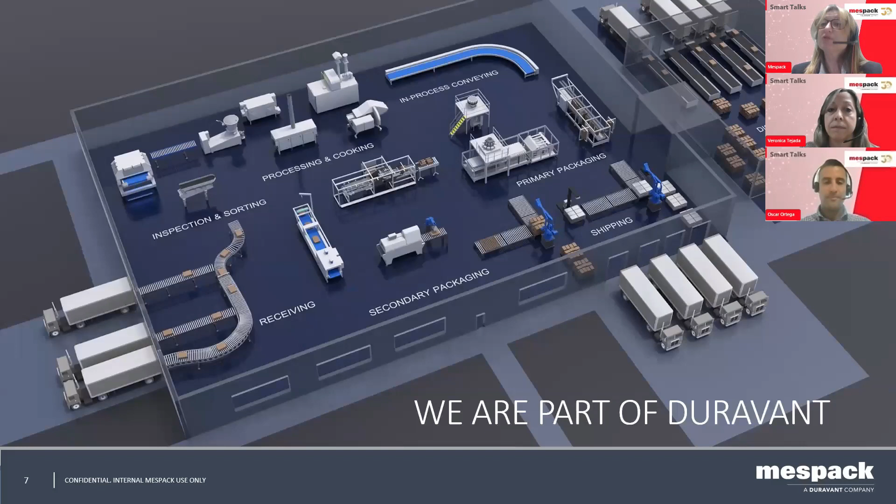Mespack has been part of Duravant since 2015. Duravant is the leading player in the world of industrial equipment. Headquartered in Downers Grove, Illinois, Duravant is a global engineered equipment company with manufacturing, sales, and service facilities throughout North America, Europe, and Asia. Given its portfolio of operating companies worldwide, sales, distribution, and service networks, Duravant provides immediate and lifetime aftermarket support to all sectors shown here, serving the food processing, packaging, and material handling industries with various operating companies and brands.

Here at Mespack, as mentioned before, Mespack was established in 1993 as a horizontal form, fill, and seal manufacturer. After 30 years, this year we are celebrating our 30th anniversary, having become a strong and reliable one-stop shop player with premium services worldwide.

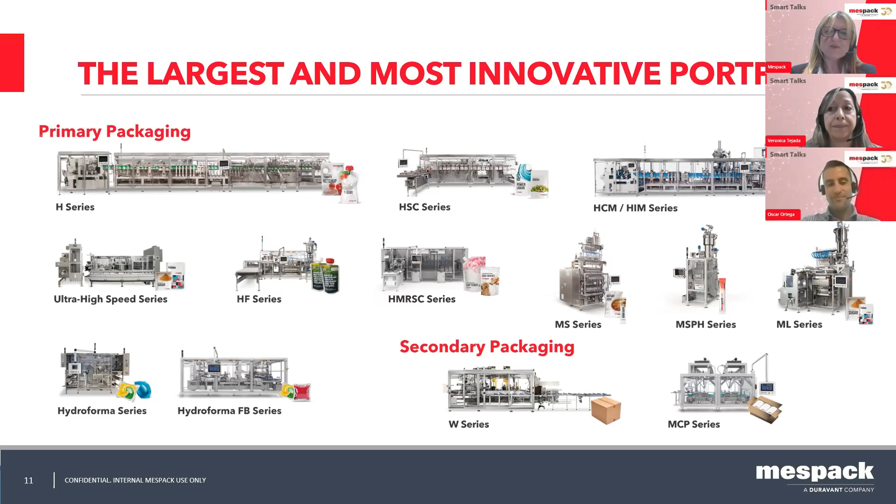We also extend beyond primary packaging with our end-of-line equipment, offering a range of suitable technologies to fit your secondary packaging in your manufacturing line, with targeting solutions if you need it. So this marks the beginning of our introduction to Mespack, providing you with the opportunity to familiarize yourself with who we are.

But now, Oscar, I'll pass the floor to you. Thank you. Thank you very much, Veronica. So let me make sure I have control over this. Yes, I do. Okay, so good morning, everybody again.

I still remember when it was 2019 that we first heard that the industry would require that all laminates used to produce pouches on our machines would need to be from a recyclable material at some point. At that time, I can say that we are proud that we embraced that as an opportunity, not as a challenge or a risk, to help our customers transition to those requirements.

We knew we could not do it alone, so we needed the help of customers, but also of laminate manufacturers, pad manufacturers, all the stakeholders that participate in this industry, to join forces and understand what needed to be done in our machines in order to make sure that they could smoothly transition to that.

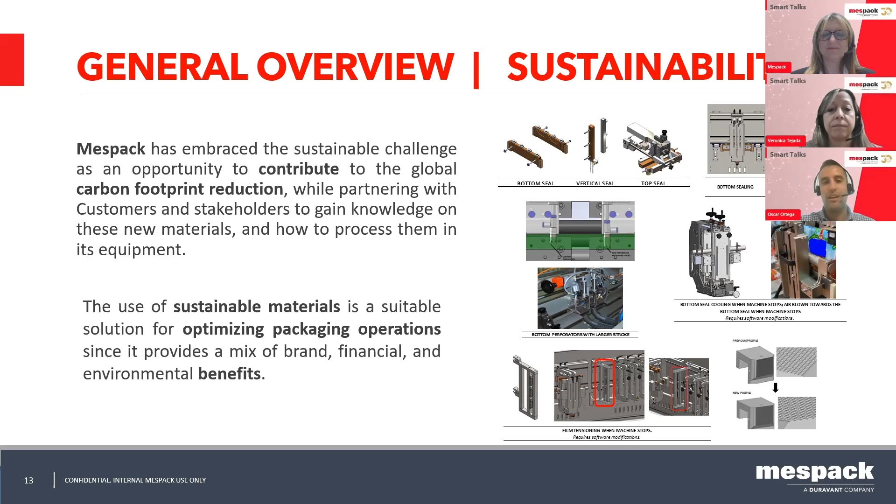We took the approach that we wanted solutions to be applied not only for new machinery, but also to the machinery that we have in the installed base nowadays, so customers with an existing machine could adapt it. So all the kits that we will walk you through now are kits that we can adapt to existing machines, but also to new equipment.

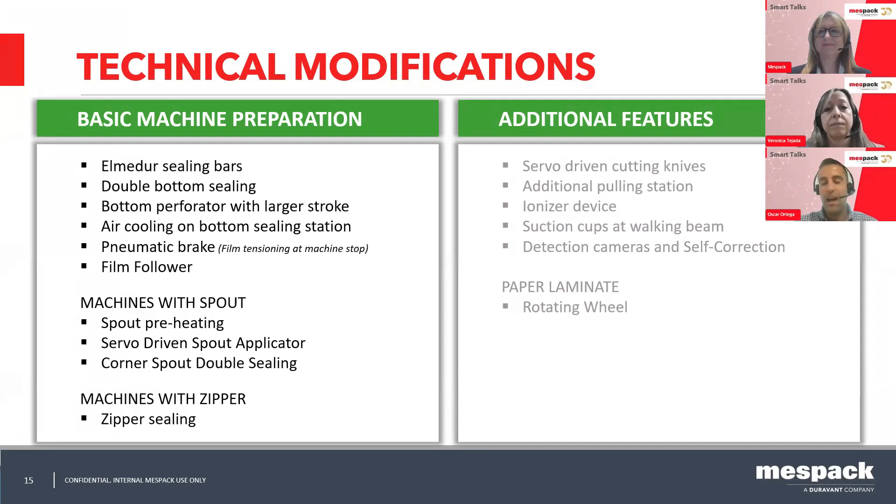We have separated them into what we call basic, because it's kits that we would recommend straight away if you want to modify your machine, but also if you want to get a new machine. And there are some additional features that we do not consider mandatory, but in some cases they can be based on some learnings that we have. In any case, they could add value for your machinery.

To begin with, Veronica will help us walk through the first slides, and I will take over later on to finalize. So Veronica, please.

Okay, thank you, Oscar. Let's start with our intelligent packaging solutions. First of all, the sealing bars have to be made of Elmedur material. Standard sealing bars, not Elmedur, have a variation of plus or minus 10 degrees across the sealing bar, while Elmedur sealers have a variation of plus or minus 3 degrees. Recyclable film does not allow big variation across the sealing bars, so for this reason, we recommend Elmedur sealers in order to get the proper seal.

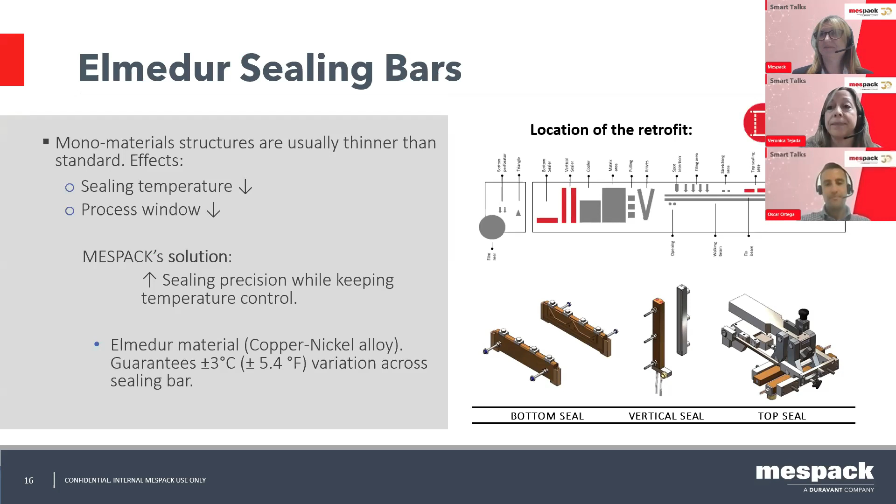Double bottom sealing station. With this kind of film, we have to add a second bottom sealing station to do the sealing in two steps with less temperature. Configuration will be: first station, Elmedur-silicone; second station, silicone-Elmedur. With this configuration, we ensure a correct seal at the triple point.

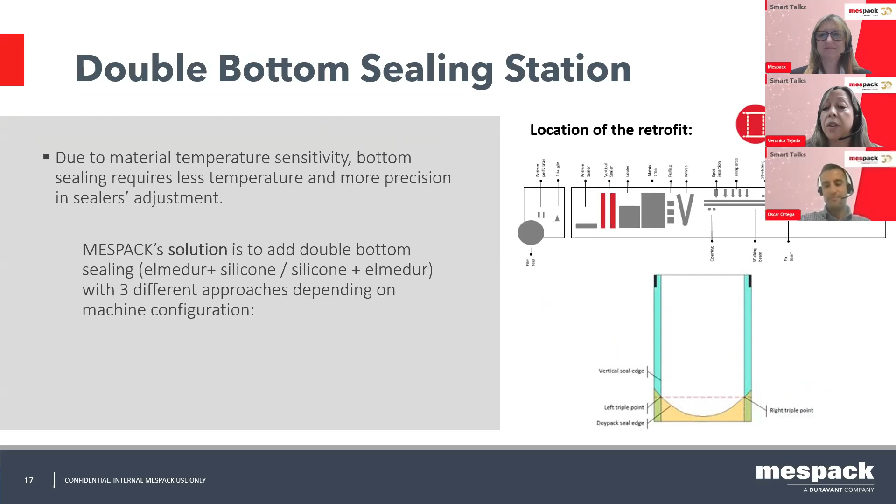There are three different approaches. Option 1: machine with enough space between bottom and vertical sealing. In this case, we will add a second station with the same configuration that I mentioned before.

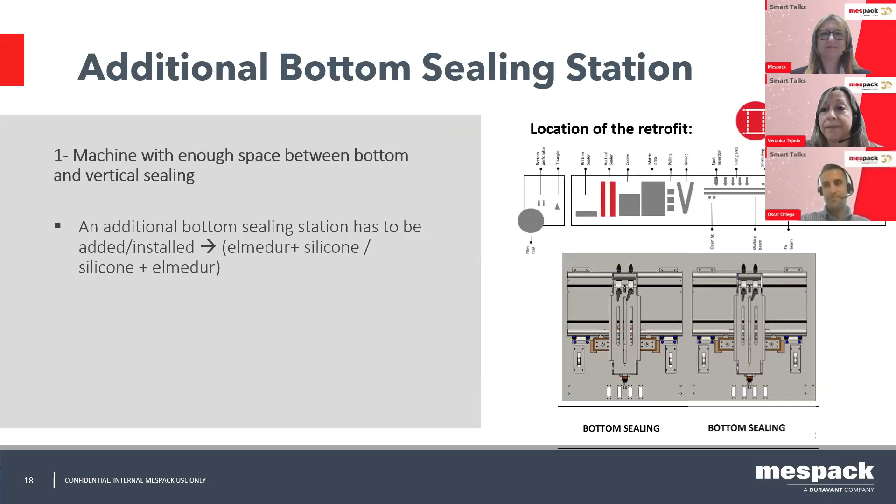Option 2: machine with no space between bottom and vertical sealing. We will have to add an independent module between the unwinder and machine frame. Here we have to take into consideration that the machine footprint will increase by about 1 meter.

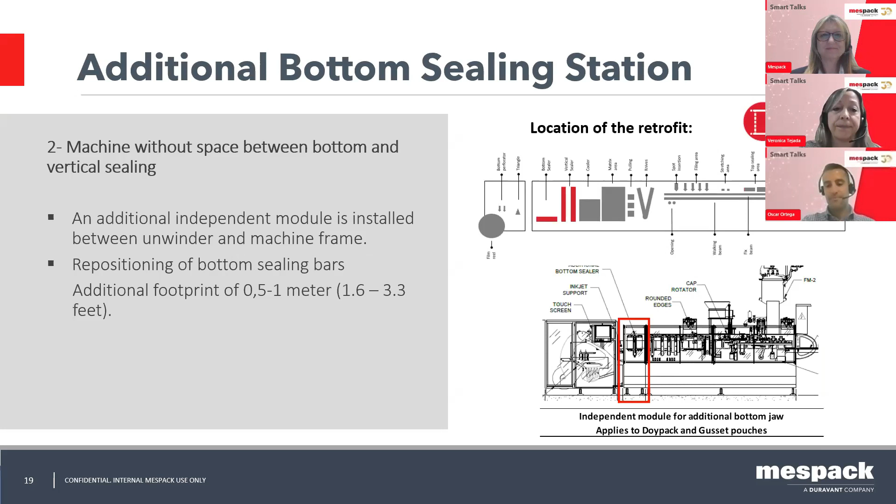Option 3 is machine with zipper. In this case, we will adapt the zipper station. We will add bottom sealers at the zipper pointer station, and all the sealers have to be made of Elmedur.

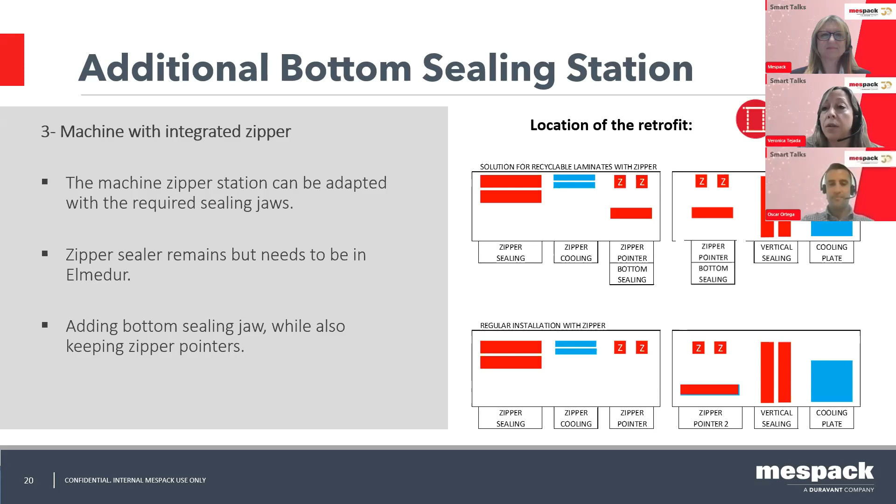Bottom perforator with large stroke. New materials are more flexible, so with standard bottom perforators, we cannot get proper perforation of the film. The solution is to add large stroke bottom perforators to ensure the perforation and the scrap removal.

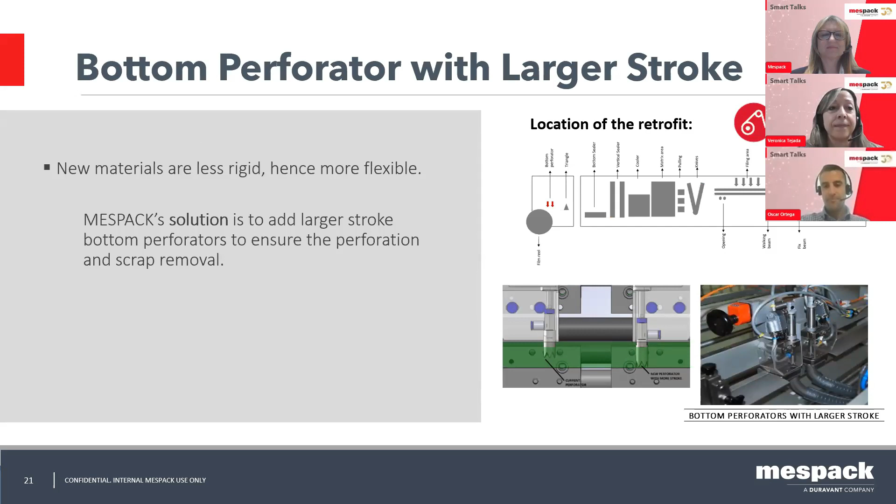Air cooling on sealing station. When the machine stops, there is heat accumulation in the bottom sealers, and the film may stick to the sealing bar surface, so you will have to clean the sealers, which means additional downtime. The solution is cooling the bottom sealers using an air turbine.

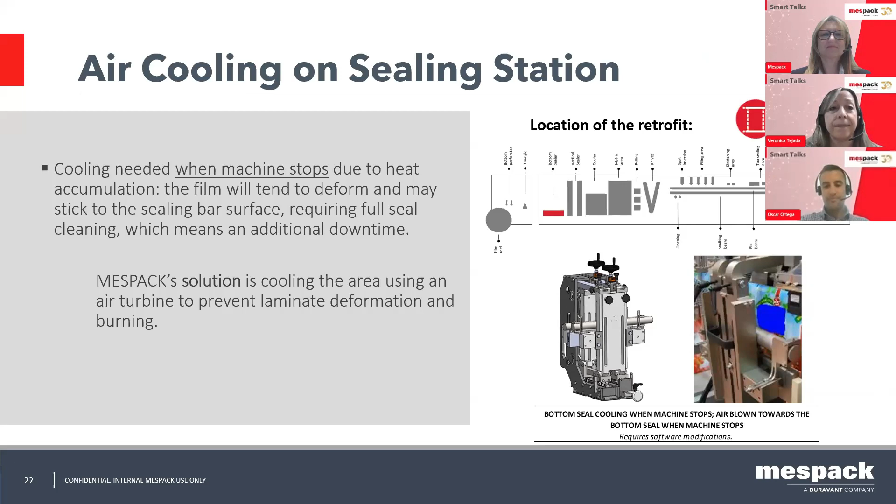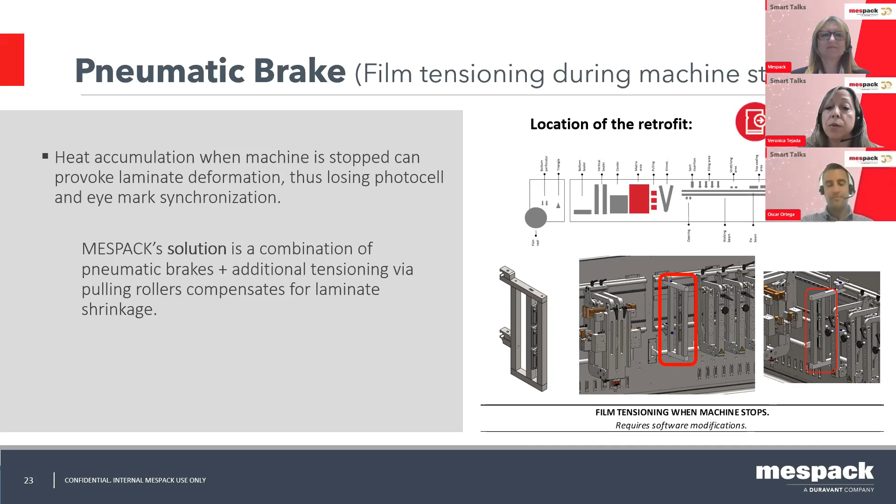Pneumatic brake. As I mentioned before, when the machine stops, there is heat accumulation, and the film deforms, causing loss of the photocell and eye mark. The solution is a combination of pneumatic brakes plus additional pulling rollers in order to compensate for laminate shrinkage.

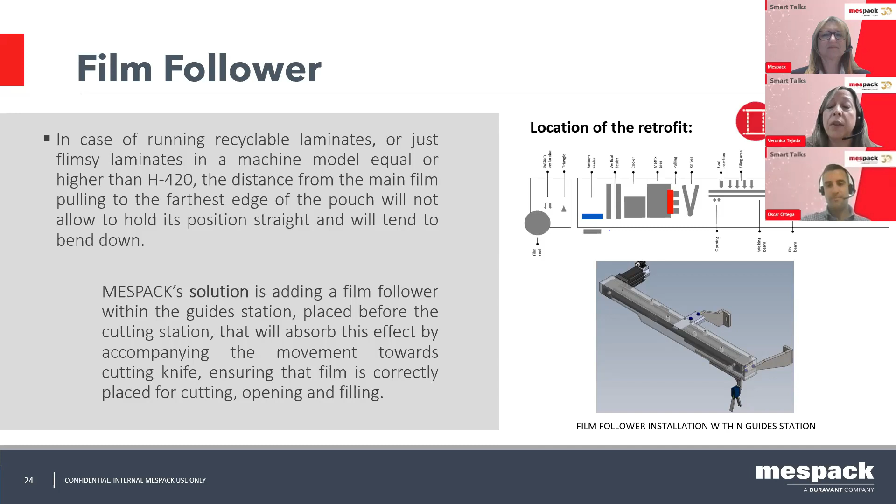Film follower. If we talk about machines higher than H420, the distance from the main pulling to the pouch does not allow a straight position of the film, which means the film could droop down. The solution is to add a film follower before the cutting station, so we get correct positioning of the film.

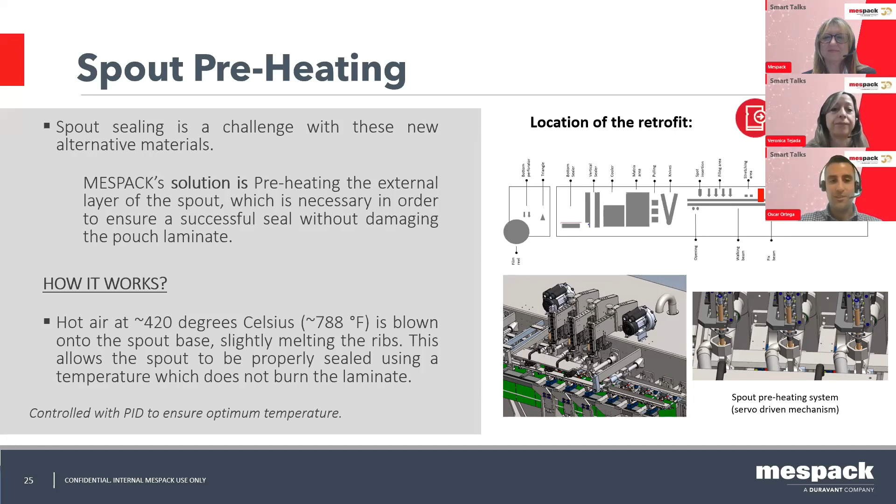This has a requirement, shown here: the insertion of the spout into the pouch needs to be rotary, meaning it's servo driven. New machines are already built like that, but it has not always been the case. Some of our machines from the early stages do not have this rotary system, and unfortunately, the solution we designed for preheating requires that.

Meaning, if you have a machine that already has a rotary application, that's good news, because it could easily be adapted to the preheating. If you do not have the rotary system, we would need to add that as a requirement, transforming the insertion of the spout to be rotary, along with the preheating operation itself.

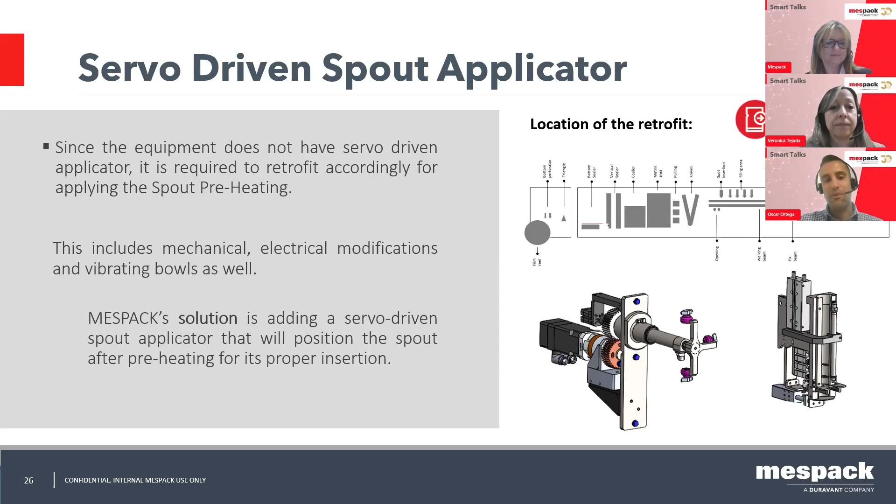Still with the spout seal, what we also learned, especially for a corner spout, is that the standard operation had one station where we seal—meaning we apply temperature and pressure—and a second station for pointing, which is basically just pressing, without the amount of pressure or temperature used in the sealing station. So what we learned is that we need to duplicate this, in line with what we mentioned on the bottom seal, duplicating the process to distribute the temperature in two stages and accommodate the pressure across the two stations.

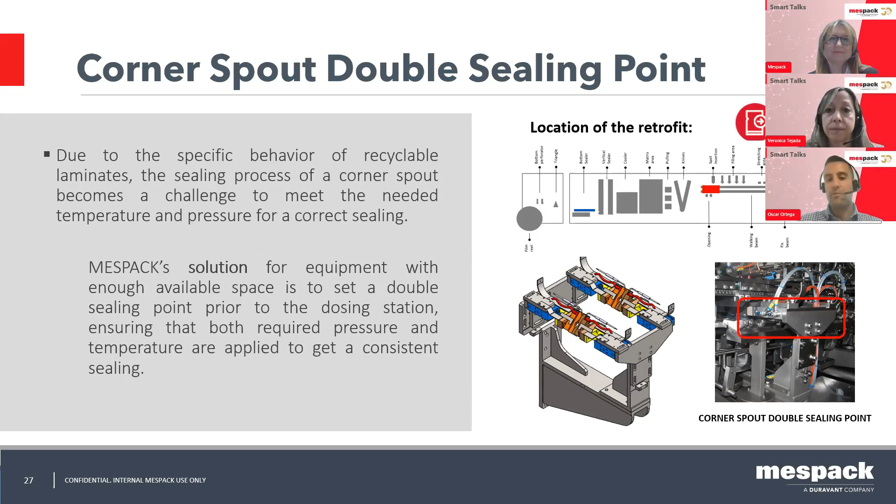So this is an adaptation that we can also do for existing machines.

If we talk about zipper sealing, we mentioned slightly earlier that they also need to be in Elmedur, what we call the zipper sealers. But the zipper sealer also requires some crushers, which you can see here in the pictures.

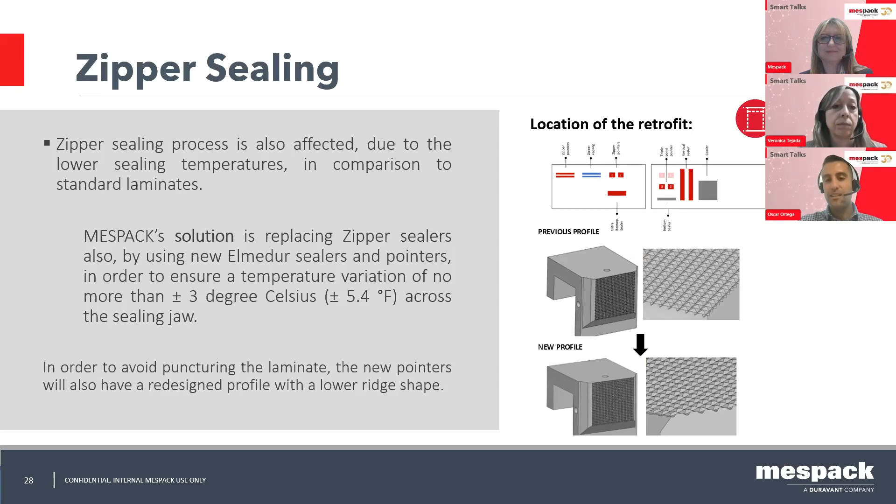So there are two particularities we need to provide for those crushers. Number one, they need to be in Elmedur material—if you remember, the material that ensures a stable variation of maximum plus minus 3 degrees Celsius across the whole sealing jaw. And we also modify the profile, which you can see in the zoomed image, in order to prevent puncturing the laminate when we press. This is something we observed in some testing, so we provide this profile to prevent that.

If you remember, we mentioned there were some basic preparations, so all the kits mentioned before stand for the basic setup. What I will introduce now is what we call the additional features. These are ones we would not recommend from the very beginning, but there are some particularities that may require them, and it's good for you to know that Mespack has these solutions, because they add value to the process with laminates.

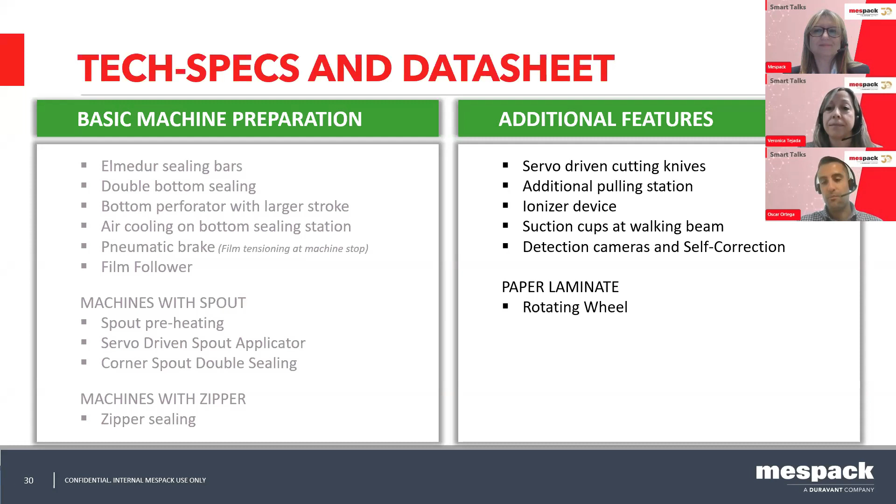So one solution is on the cutting knives. The standard way of cutting on any Mespack machine is linked to a mechanical camshaft, where the machine speed dictates the cutting velocity of these knives. What we have observed is that when we want to cut large pouches with zippers, we require a minimum velocity that needs to be met.

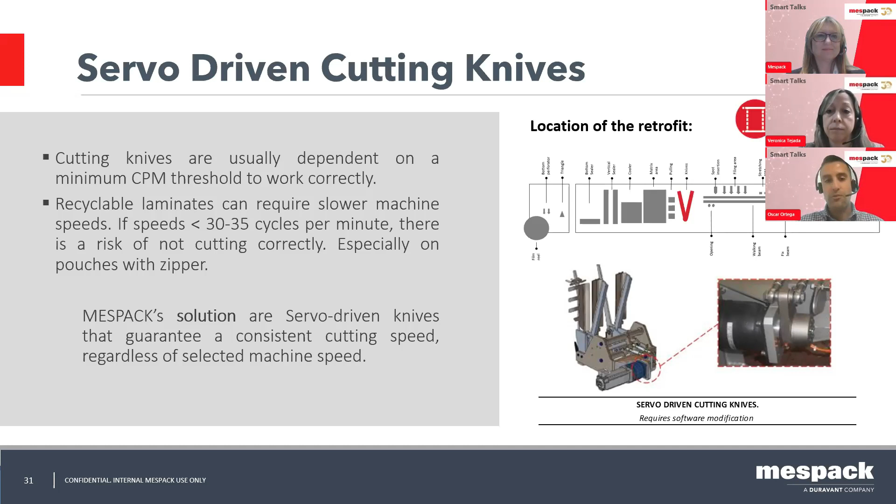If we're running at low speeds, such as 30 or 35 cycles per minute, we cannot secure proper cutting, and this gets worse with recyclable laminates. So we developed a system completely independent of the camshaft, making the cutting servo-driven. We can adjust the cutting velocity as needed, which assures effective cutting. This is needed when pouches are large and include a zipper, running at low speeds like 30, 35 cycles per minute or lower. Outside those conditions, the system is interesting but not mandatory.

The pulling station. As a general design standpoint, machines are always provided with two pulling stations. The main pulling rollers are just before the cutting knives, and there is a second pulling station in the unwinding unit. In the early stages, the original machine design did not always include this second pulling station in the unwinding unit, so pulling was mainly done at the main rollers before the cutting station.

One characteristic of the new recyclable laminates is that they tend to stretch when pulled. This pulling distance may be an issue if we don't have the second pulling station, as in the first years when we delivered machines like that. If you already have two pulling stations in your machine, that's good news and should not be an issue. But if you only have one, it's likely we would need to introduce a second pulling station.

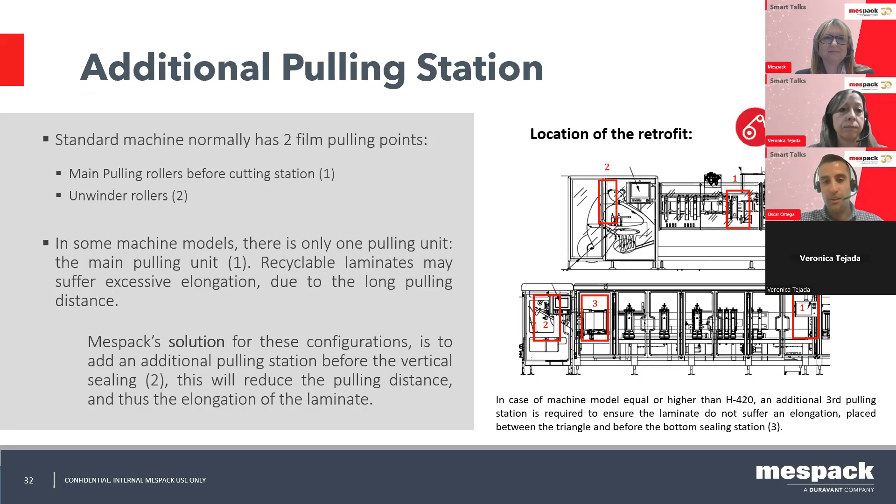Talking about static electricity, standard laminates can be sensitive to static electricity, and with recyclable laminates this characteristic is even higher. The ionizer device removes that static electricity. Since we place it just before the cutting knives, we want to secure that once the pouches go into the opening station, they do not tend to close later due to static electricity. This is an element we can simply install there.

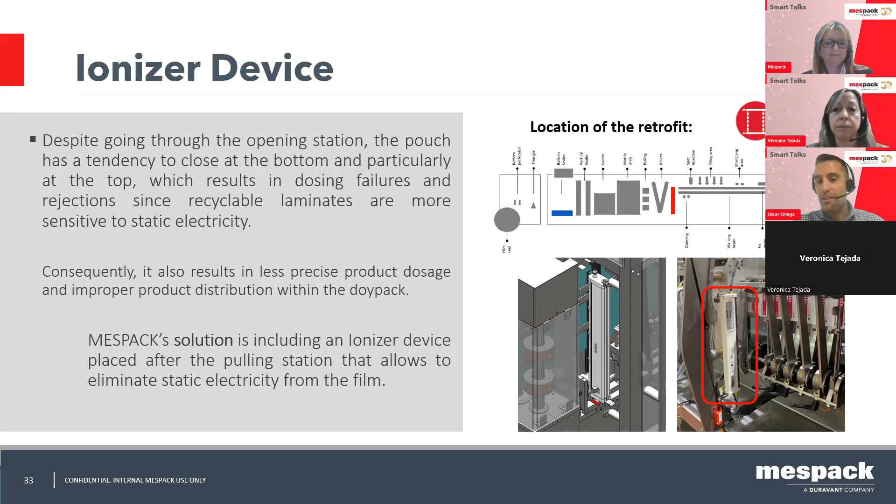This can be combined with suction cups placed in the walking beam, mimicking the concept of pouch opening with suction knives where we apply vacuum. Once the pouch has been opened, the walking beam grabs the suction cups, grabs the pouch, and applies vacuum to keep it open as it transitions to the filling station. This ensures that when it arrives at the filling station, we stop the vacuum and ensure that whether it's a funnel or a nozzle, it comes in properly so it's not closed, and we do not create spillage all over the machine frame.

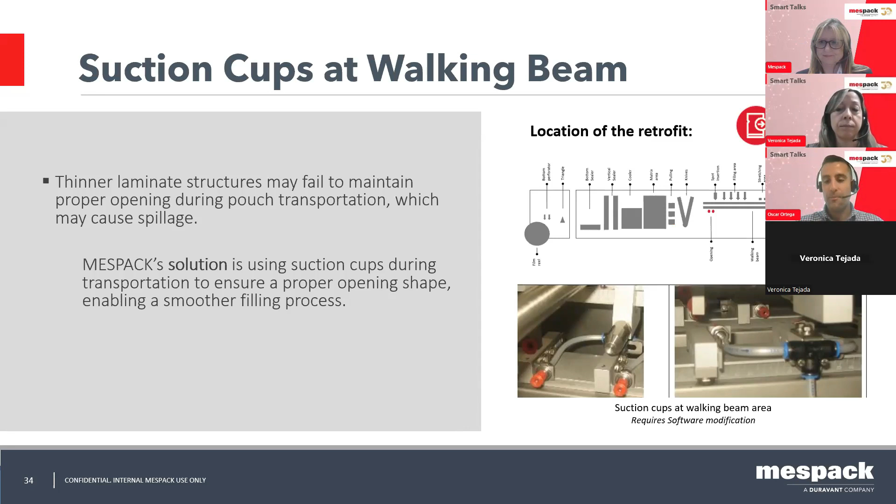Self-correction cameras are also getting more and more important because they help with the tolerance we have with the eye mark. The laminate is synchronized with the machine via eye marks with a photocell, but this needs a tolerance, which as a standard for MESPACK is plus minus 0.5 millimeter within 1 meter. If this tolerance grows up to plus minus 1 millimeter in 1 meter, the machines are still able to process that without any change. However, if it grows to plus minus 2 millimeters, and we don't do anything, the machine will suffer accumulation of this error, and eventually we will lose synchronism.

We would need to stop the machine, readjust everything and start again. And if the tolerance is still off, plus or minus two or higher, we'd have this over and over, which creates unplanned stoppages that we don't want.

So the system we developed is a combination of cameras and servo motors to reposition the sealing jaws. The cameras take a picture every cycle on the photocell and compare it with boundaries we define. If the picture is within those boundaries, that's okay.

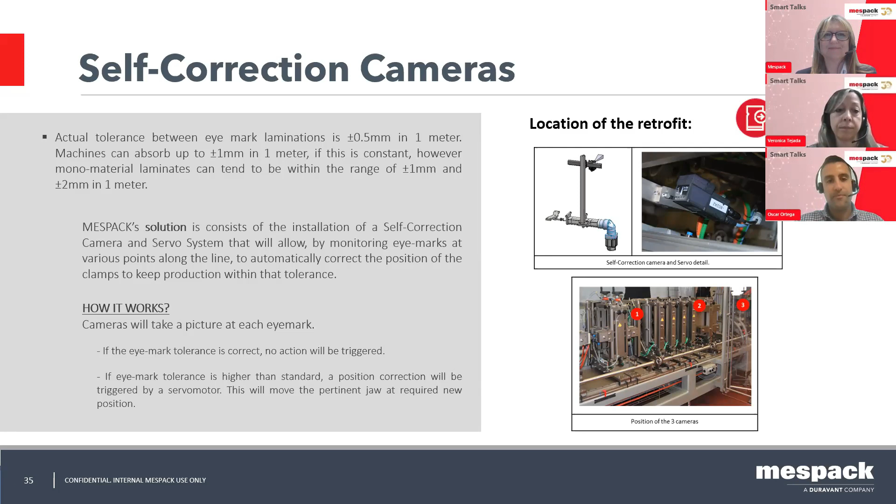Paper is also becoming a trend in the last months. So it's not only laminate, like mono material or polyolefins, paper is also part of the solutions we are exploring.

Along with all the other kits we've mentioned, one important adaptation we need is on the forming of the gusset for doypack pouches. If we use the standard solution, which is a triangle, the edge of that triangle may scratch the surface of the paper, because it's much more sensitive than laminate.

So what we do is take a similar concept, which we internally call the pizza wheel, because if you look at the picture it's like a wheel that rotates, same as when we cut a pizza. It performs the same function of forming the gusset of the pouches, but this wheel accompanies the laminate rather than being a fixed point, and therefore doesn't scratch the paper.

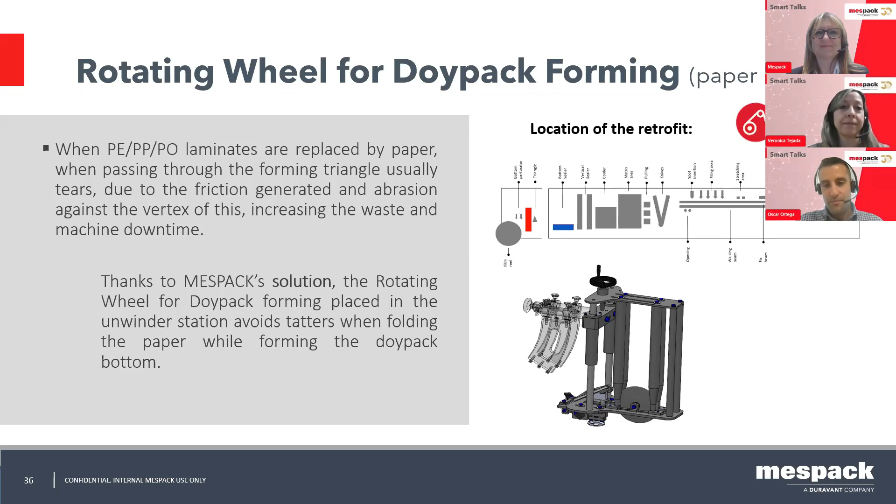So all these were the kits that we have available. Again, they can be retrofitted into existing machines, or they can be equipped in new machinery.

Let me just wrap up with what we call the key value drivers. Why should you pursue this, what's MESPACK's position in this.

Number one, environmental sustainability. We want to contribute to lessening the carbon footprint, and we want to help customers with their CSR, corporate social responsibility values, by introducing recyclable laminates.

Flexibility comes basically from helping transition from rigid materials to flexible materials, and moreover, if they can be recyclable.

Brand reputation comes from the value we can bring to customers, in a society that is more and more concerned about eco-friendly packaging, and the value we bring to our brands if we use these recyclable materials.

Cost saving. Let's not forget that the cost of manufacturing flexible packaging is much reduced compared to rigid, and the warehousing footprint can be reduced up to 70%.